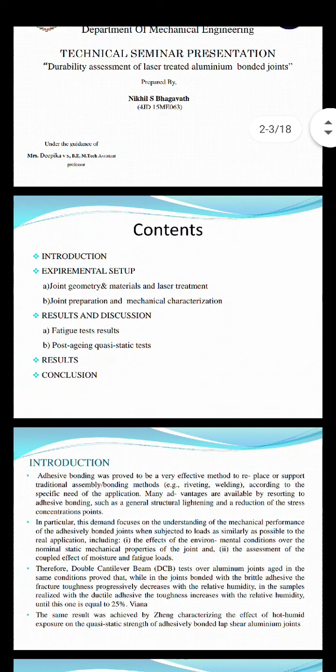The content of this technical seminar includes introduction and experimental setup, joint geometry and material and laser treatment, joint preparation and mechanical characterization, results and discussion, fatigue test, post-aging quasi-static tests, and conclusions.

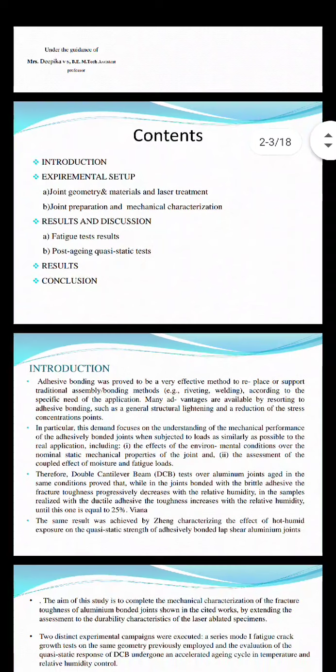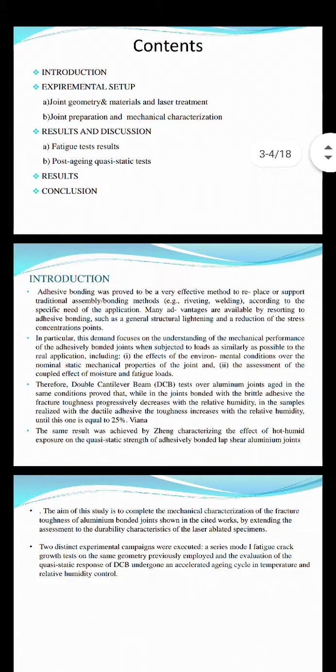Coming back to the introduction, this is majorly a material science project, and all the properties presented in this seminar relate to material scientific properties.

In the introduction, I will explain adhesive bonding. It is a type of bonding proved effective for replacing or supporting assembly jointed points, such as rivetings or weldings. Depending on the specific application, many advantages and disadvantages exist for adopting adhesive bonding, such as greater structural lightening and reduction of stress.

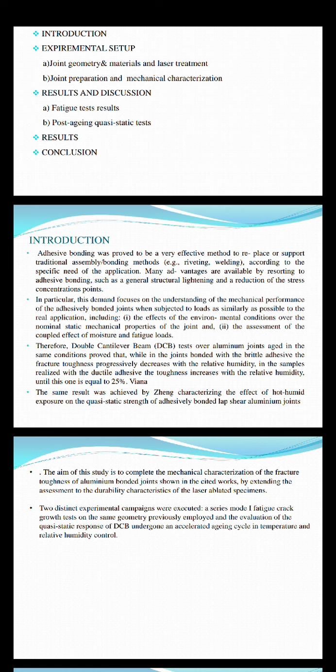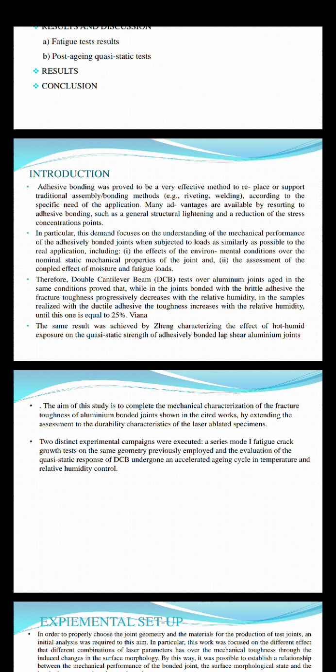The demand is focused on understanding the mechanical performance of adhesively bonded joints when subjected to conditions similar to real-time applications, such as environmental effects on the nominal static mechanical properties of the joint, and assessment of the coupled effect of moisture and fatigue loads.

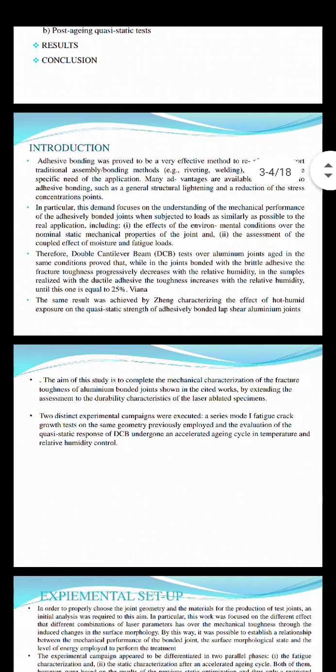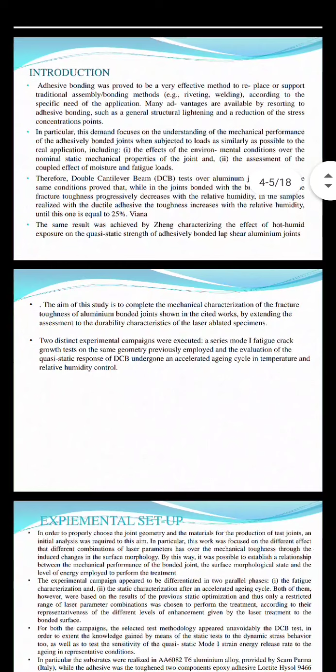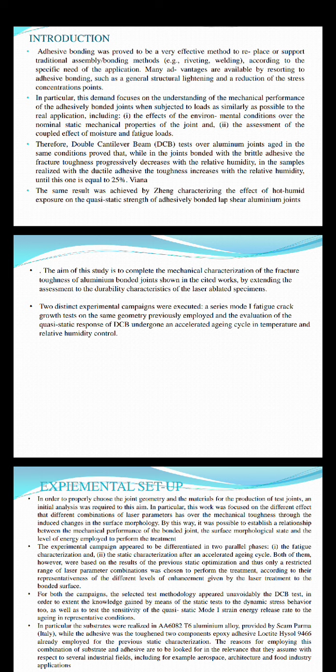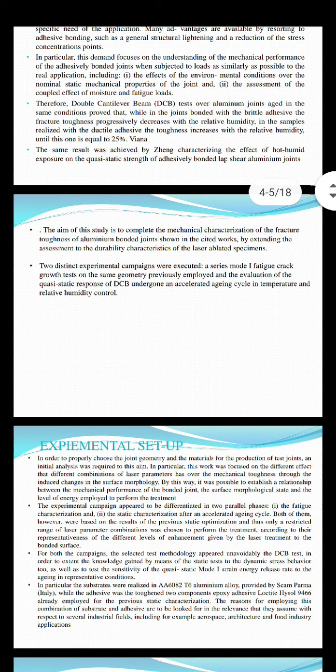The double cantilever beam test on aluminum joints aged in the same conditions showed that joints bonded with brittle adhesive have fracture toughness that progressively decreases with relative humidity. In samples with ductile adhesive, toughness changes at relative humidity around 25%. The same result was achieved regarding the effect of humidity on the quasi-static strength of adhesively bonded aluminum joints.

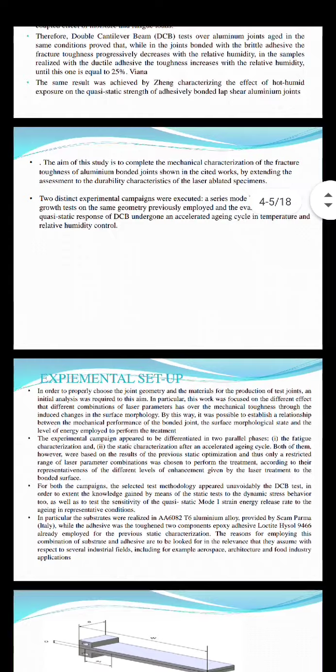Quasi-static tests will be conducted for these aluminum joints. The major aim is to study the complete mechanical characterization of fracture toughness of the aluminum bonded joints, as shown in the figure, by extending the assessment of durability characteristics to laser-treated specimens.

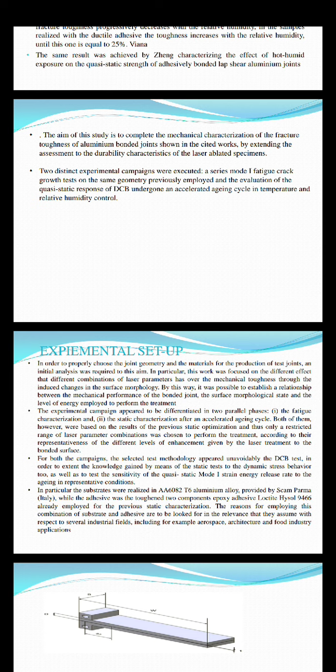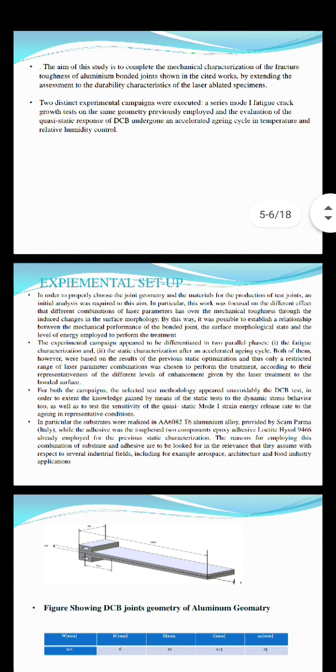Two distinct experimental campaigns were conducted in series. First, fatigue crack growth on the same geometry previously employed, and evaluation of the quasi-static response of double cantilever beams undergoing an accelerated aging cycle under controlled temperature and relative humidity.

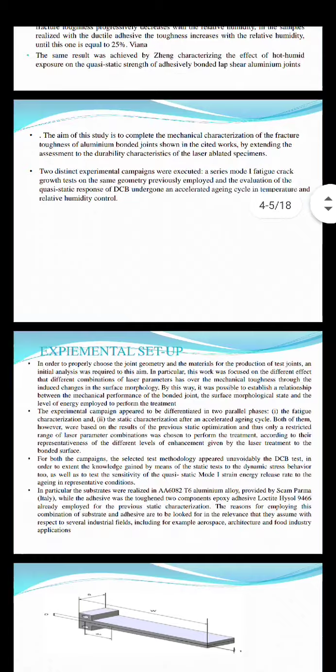Coming back to the experimental setup, here's how the experiment was conducted for this double cantilever aluminum bonded joint using laser treatment.

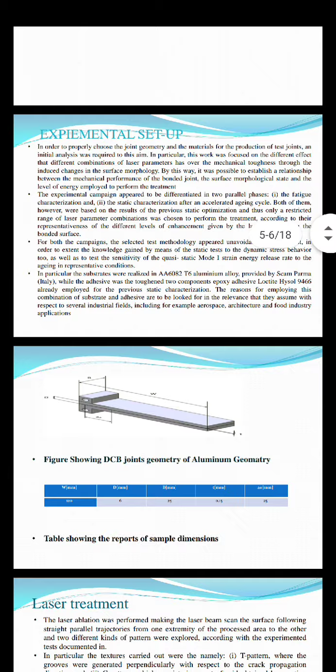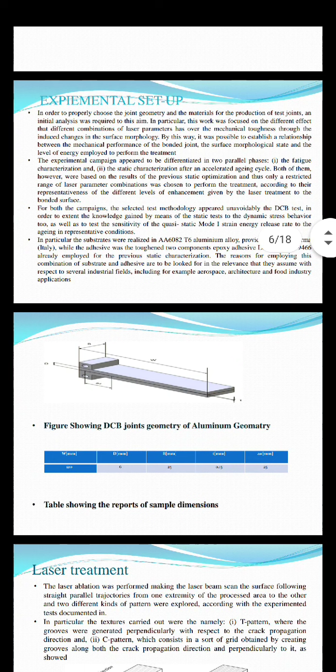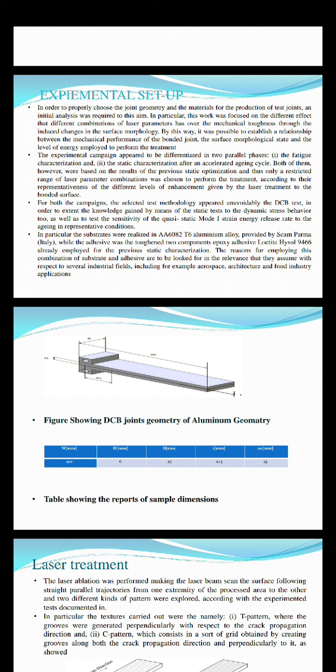In order to properly choose the geometry and materials for producing the test joints, an initial analysis was required. The work focused on the different effects of various laser parameter combinations on mechanical toughness through induced changes such as surface morphology.

The experimental campaign was differentiated into parallel phases: first the fatigue characterization, and second the static characterization. Both were treated under laser treatment.

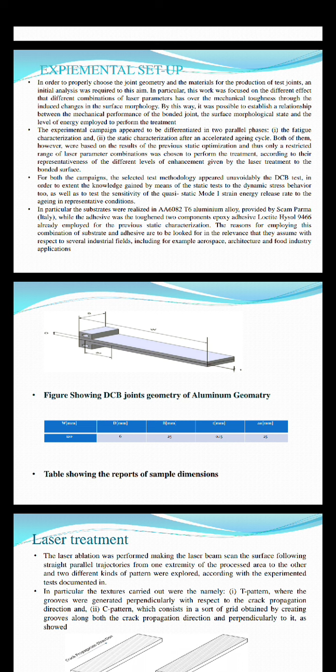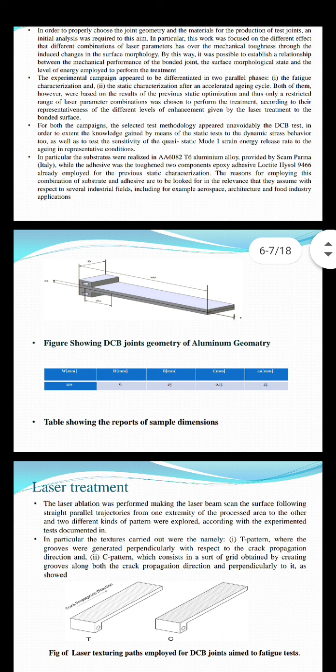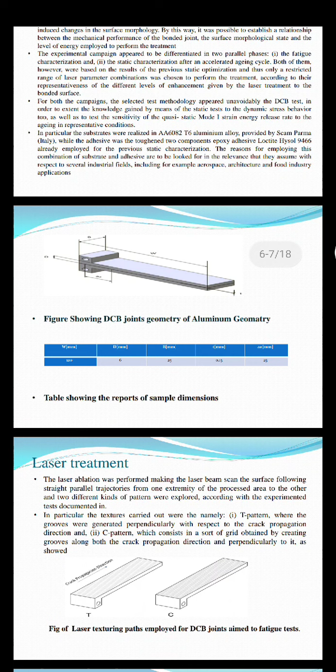For both campaigns, the selected methodology relied on the double cantilever beam test, in order to extend the knowledge gained from static tests to dynamic stress behavior, as well as sensitivity to quasi-static Mode I strain energy release under representative aging conditions.

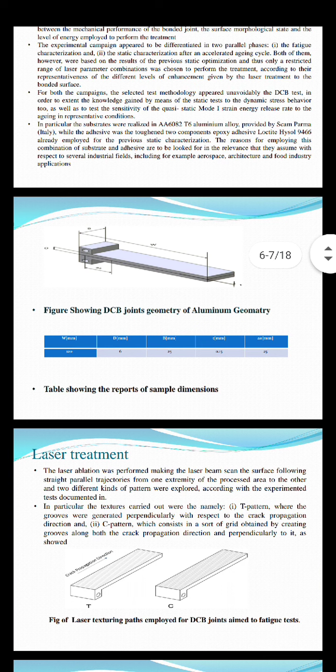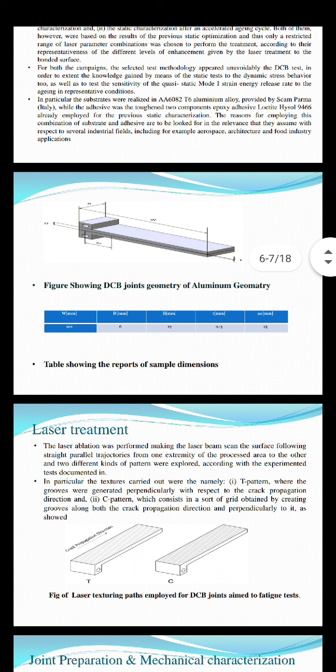The substrate was AA6082 T6 aluminum alloy provided by SCAM Parma, while the adhesive was a tough, two-component epoxy adhesive, Loctite 9466, already employed in the previous static characterization.

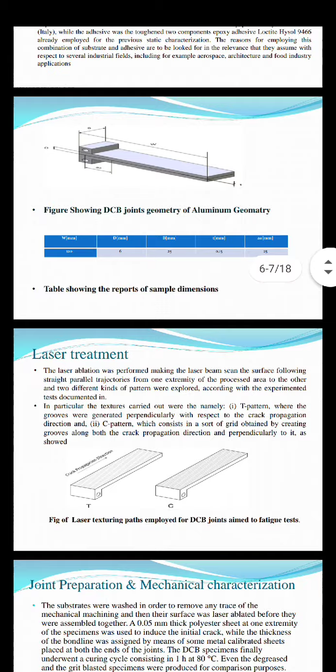The figure below shows the double cantilever beam of the aluminum bonded joints, and the table below shows the dimensions of this double cantilever beam aluminum bonded joint.

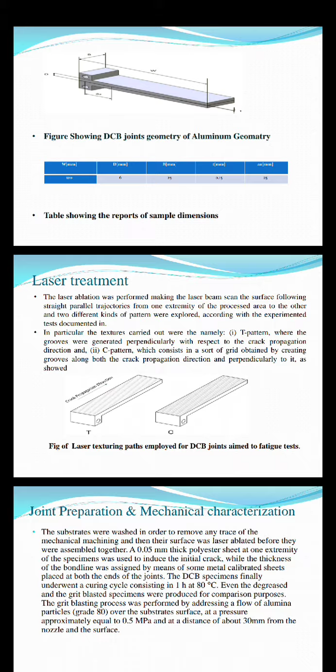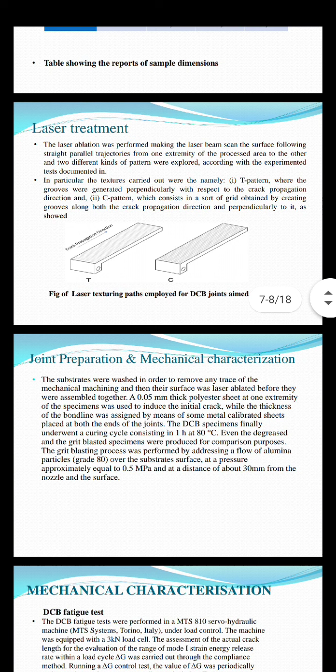The laser treatment was conducted as follows: laser ablation was performed by scanning the laser beam across the surface following straight parallel trajectories from one extremity of the treated area to the other.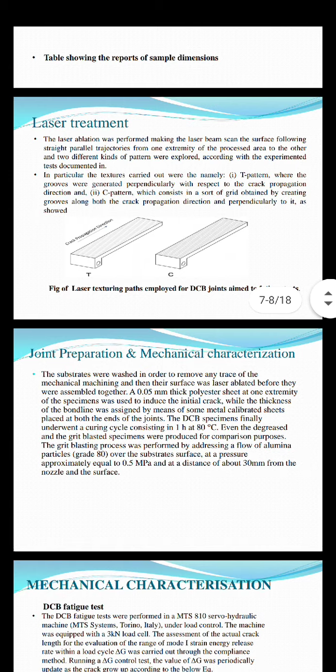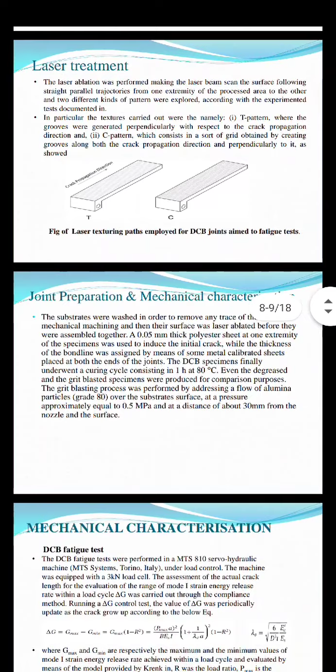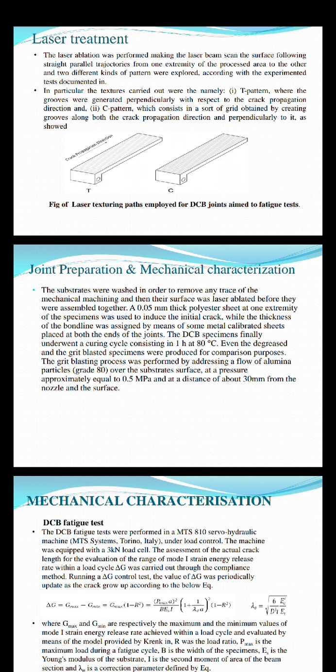The different kinds of patterns were exploited according to the experimentally tested ways. Different types of paths will be formed while the laser treatment is given. In particular, the textures carried out were the T pattern, where grooves were generated with respect to the crack propagation directions, and the C pattern, which consists of a sort of grid of grooves created in both crack propagation and perpendicular directions. It will be shown as follows.

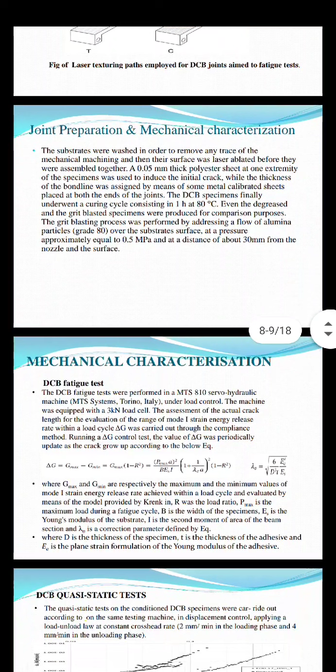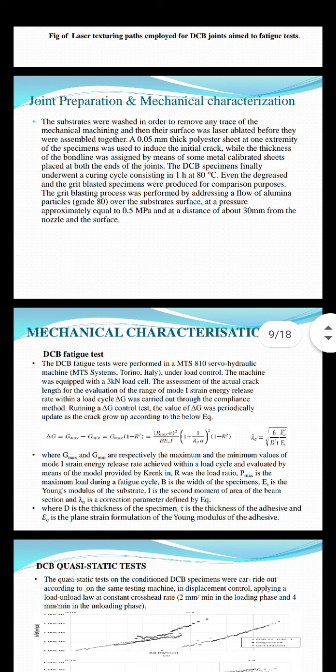Coming to the next content, joint preparation and mechanical characterization. In the joint preparation, substrates were washed to remove any trace of mechanical machining, and then the surface was laser ablated before they were assembled together. The double cantilever beams finally underwent a curing cycle consisting of 1 hour at 80 degrees Celsius. Degreased and grit-blasted specimens were also produced for comparison.

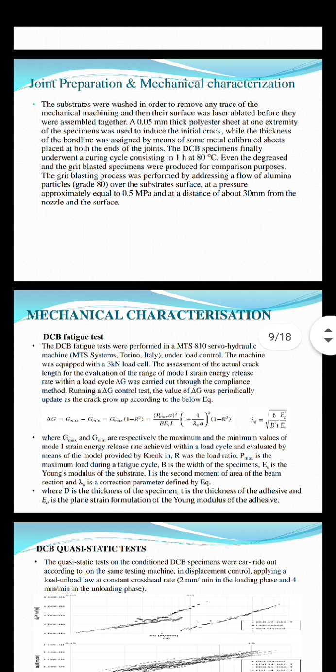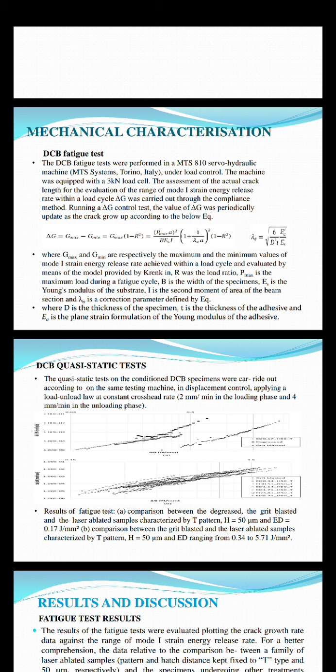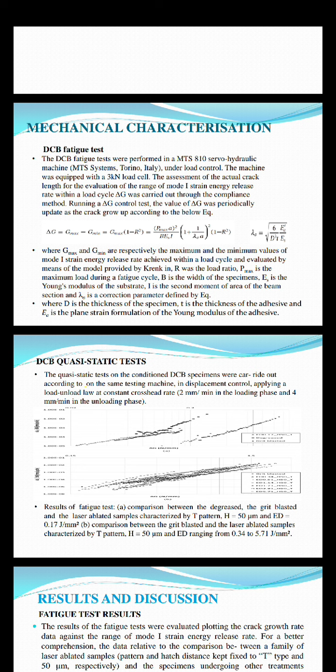Coming to the next point, the mechanical characterization, two tests were conducted: the double cantilever beam fatigue test and the double cantilever beam quasi-static test. The double cantilever beam fatigue test was performed on an MTS 810 servo hydraulic machine, which is used for conducting the double cantilever beam fatigue test. The assessment of the actual crack length and the evaluation of the range of mode 1 strain energy release rate with load cycle, delta G, was carried out.

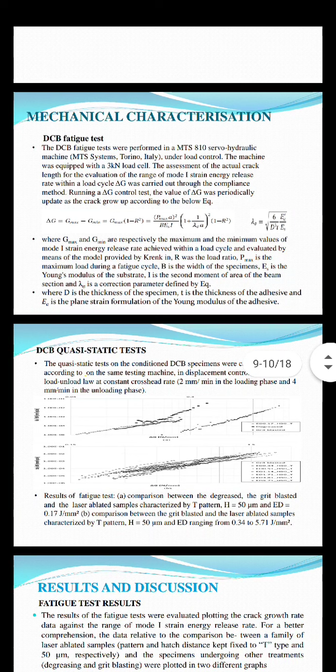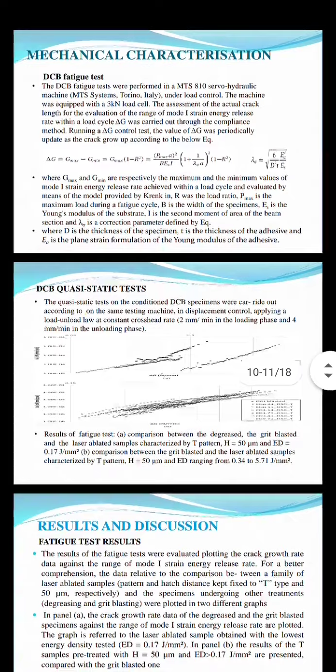Under this, there is an equation representing the DCB fatigue test, where D is the thickness of the specimen, T is the thickness of the adhesive, and E c is the plane strain formulated.

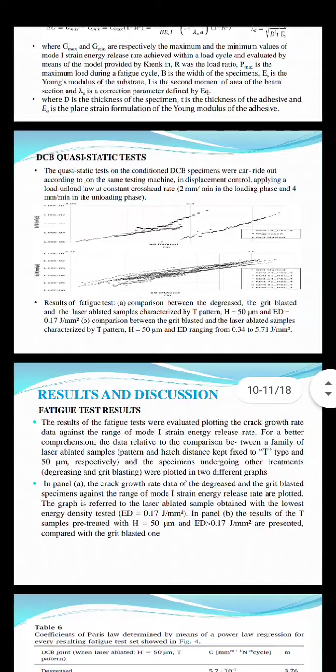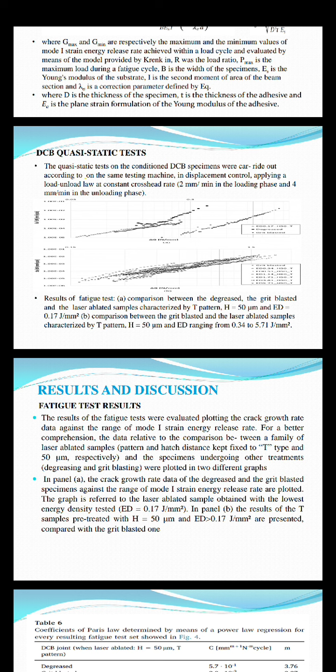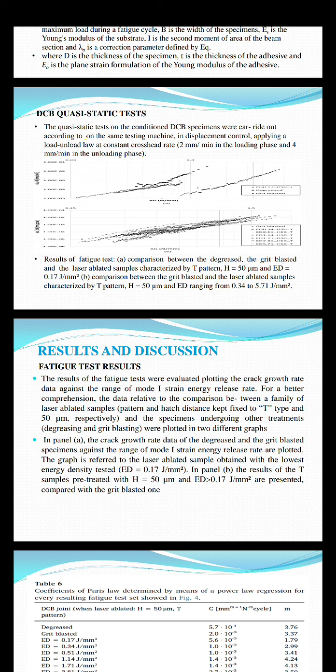In the DCB quasi-static test, the condition of the DCB specimen was carried out, and according to the same testing machine, displacement control was applied using the load-unload law at a constant crosshead rate. This is the main form of the DCB quasi-static test. Below there are two graphs explaining the changes in the properties of the material when the test is conducted.

Results and discussion.

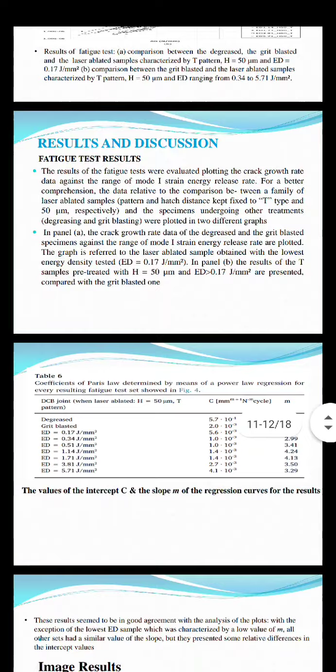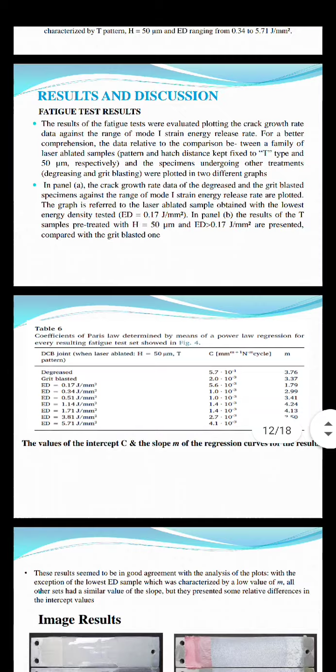Finally, there are fatigue test results obtained after conducting the laser treatment on the material. The results of the fatigue test were evaluated by plotting the crack growth rate data against the range of mode 1 strain energy release rate.

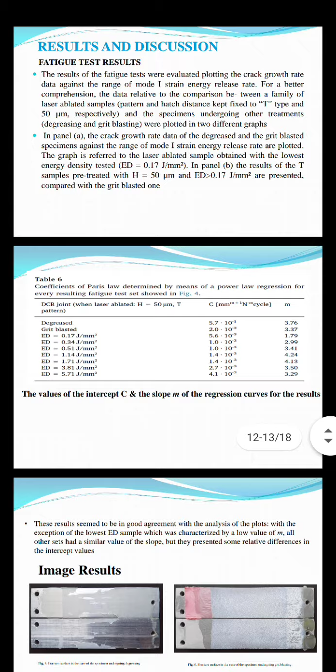For a better comparison, the data relative to the comparison between a family of laser-ablated samples, and the specimens undergoing other treatments such as degreasing and grit blasting, were plotted in two different graphs.

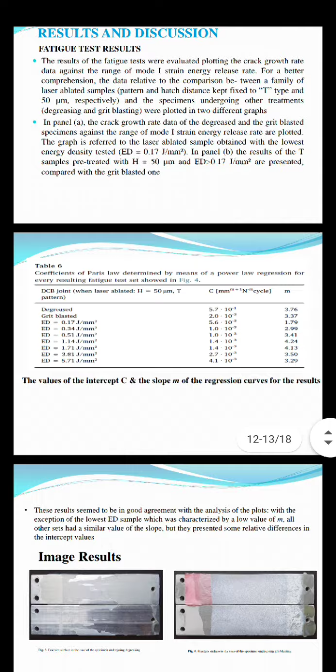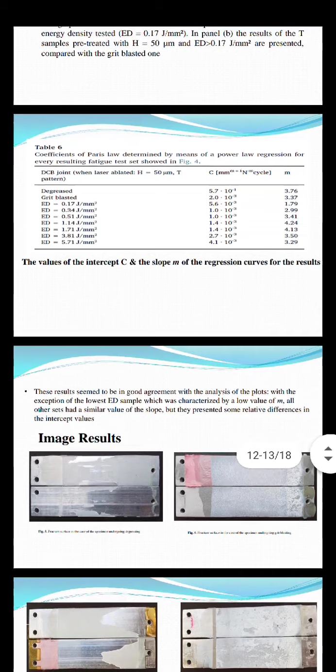There is a table mentioning where each part of the material is shown with some coefficients of the Paris law in the table.

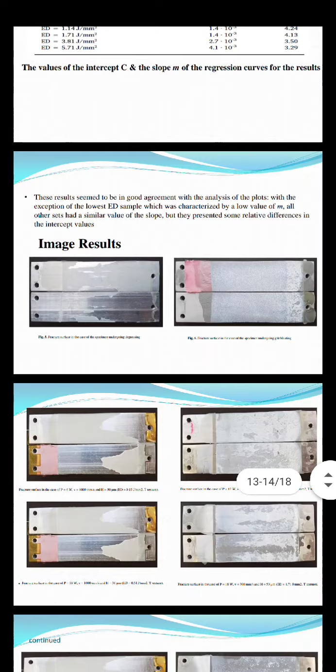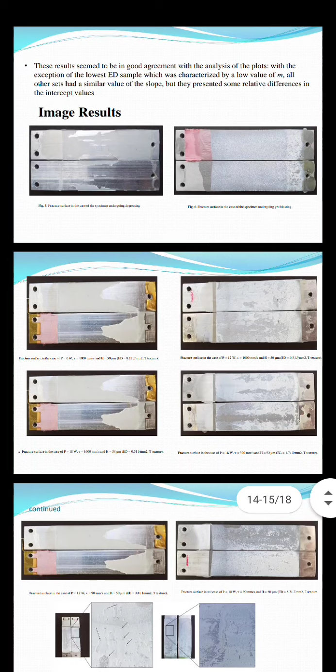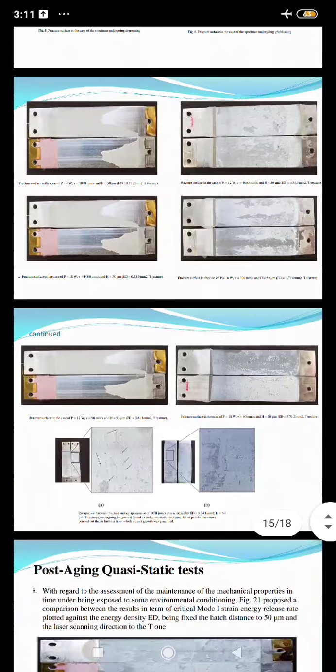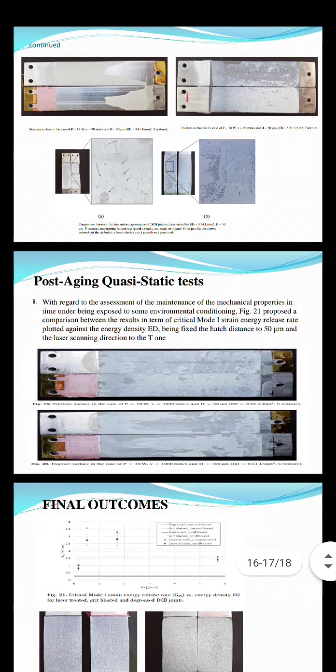Post-aging quasi-static test. This is the test conducted after the results of the double quasi-static test. In this test, the assessment concerns the maintenance of mechanical properties over time under exposure to some environmental conditions.

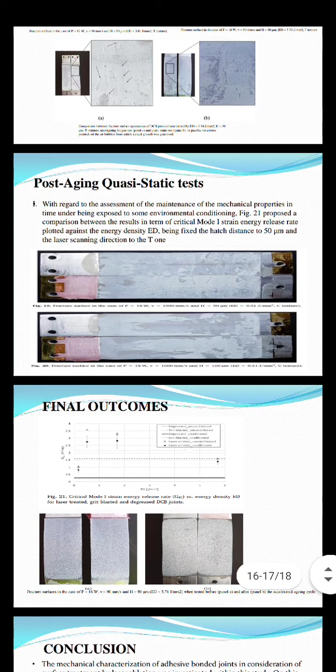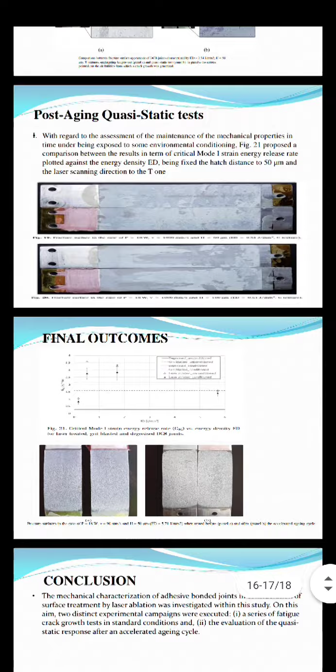The aluminum bonded joint tested under the laser treatment was exposed to the environment for some changes in this regard. The figure shows the two bonded joints exposed to the environmental conditions. The final outcome is shown below in this page. Two pieces are separated, then joined.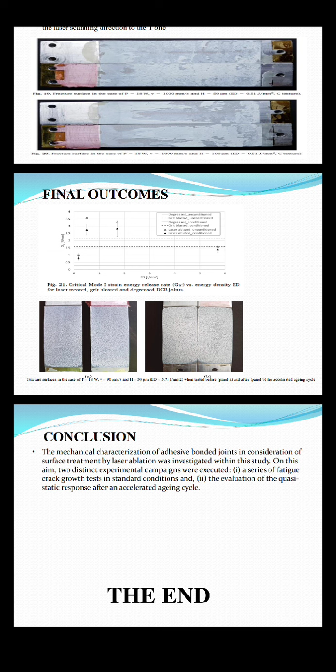Coming to the conclusion, the mechanical characterization of adhesive bonded joints, considering surface treatment by laser ablation, was investigated in this study. For this aim, two distinct experimental campaigns were executed: first, a series of fatigue crack growth tests under standard conditions, and evaluation of the quasi-static test after the accelerated aging cycle. Okay, thank you.